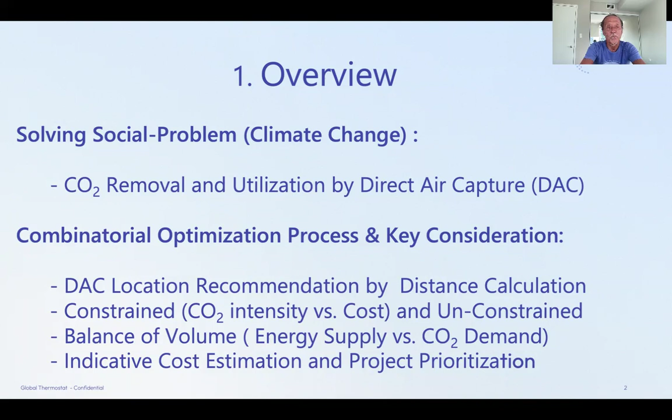My presentation today starts from solving a social problem: climate change, CO2 removal, and utilization by direct air capture, DAC. My data science benefit is a combinatorial optimization process, and its key considerations are DAC location recommendation by distance calculation, constraint, CO2 intensity versus cost, unconstrained, balance of the volume, indicative cost estimation and project prioritization.

Please allow me to present the video for a minute.

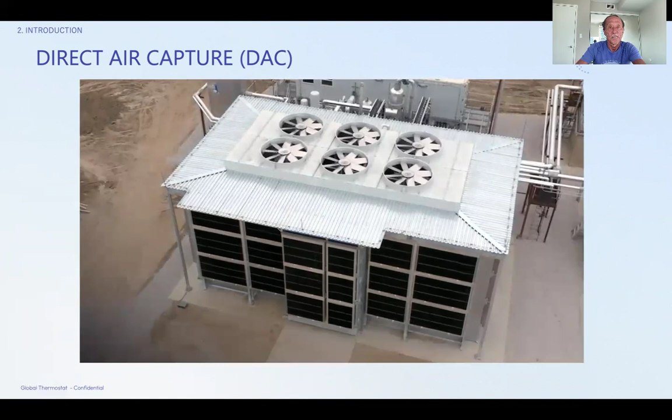Global Thermostat has developed a unique and powerful direct air capture solution to address climate change at its source and unlock massive, more sustainable industries. It's now clear we have emitted too much carbon dioxide into our atmosphere. We urgently need to remove billions of tons of this greenhouse gas to successfully address the climate challenge and rapidly replace fossil carbon with air carbon to power our economy.

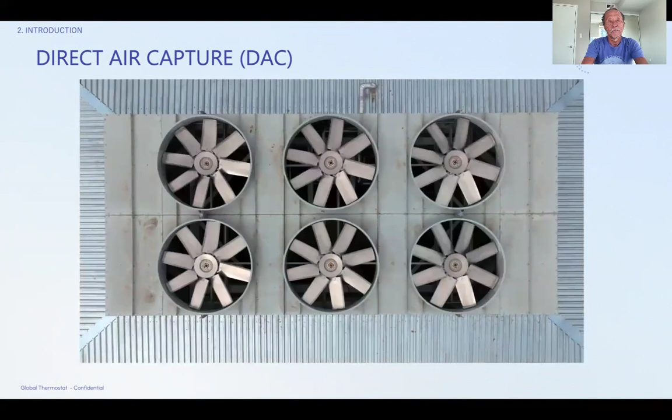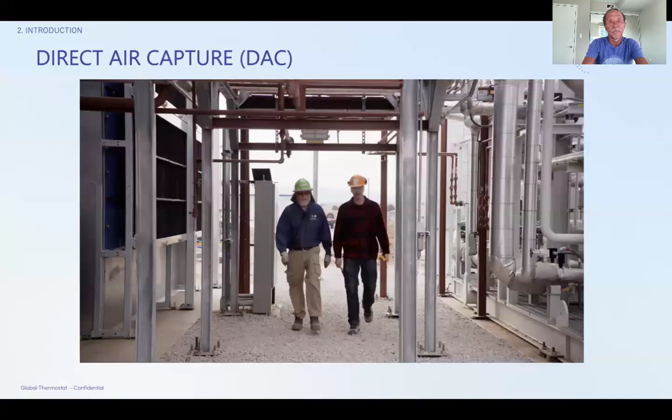Global Thermostat's patented direct air capture technology is the key to large-scale, low-cost carbon removal and the next industrial revolution. In simple terms, our solution works by using highly efficient fans to pass large volumes of air over high surface area contactors coated with a proprietary substance that naturally attracts CO2. We then use low-temperature heat to separate out the captured CO2 and repeat the process all over again.

Why am I doing this research? My career started in the early 80s. I contributed to the economic development of countries with fossil and gas resources. You can see the map; the company I used to work for, JGC, is specialized in engineering, procurement, and construction for oil refineries and liquefied natural gas. Some locations may be familiar to you: Pertamina Cilacap, Singapore Refining Jurong, Pertamina Arun

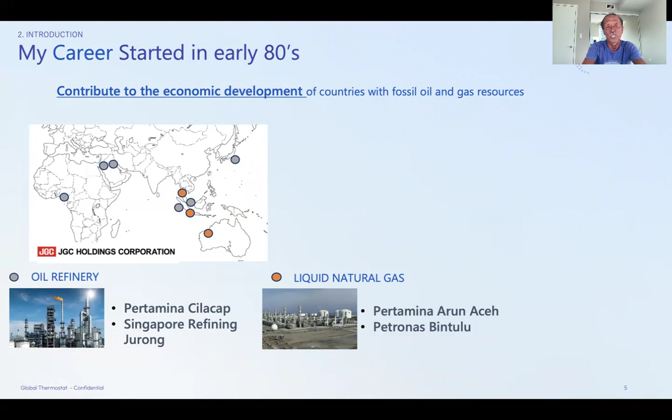Aceh, and Petronas Bintulu. After 40 years, I realized my contribution to oil refinery and liquefied natural gas projects is actually a source of CO2 emissions. As you may know, we must remove the CO2 permanently from the air. On this chart, we are always talking about how to reduce CO2 emissions.

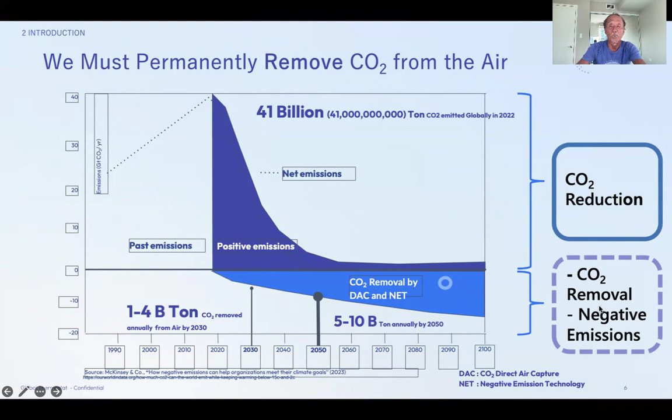The technology I'm currently focusing on is how to remove the CO2 already accumulated over the last 100 years. So we need to understand CO2 reduction technology, CO2 removal, and negative emissions. My technology is focusing on CO2 removal. Of course, we need CO2 reduction efforts as well.

So let's summarize the big picture of CO2 reduction and CO2 removal. Direct air capture is a part of negative emission technology, alongside planting trees and BECCS. Once the CO2 has been removed, we have two ways. One is storing it underground, which we call geologic sequestration, and its annual potential market size is 3.6 trillion US dollars by carbon credit.

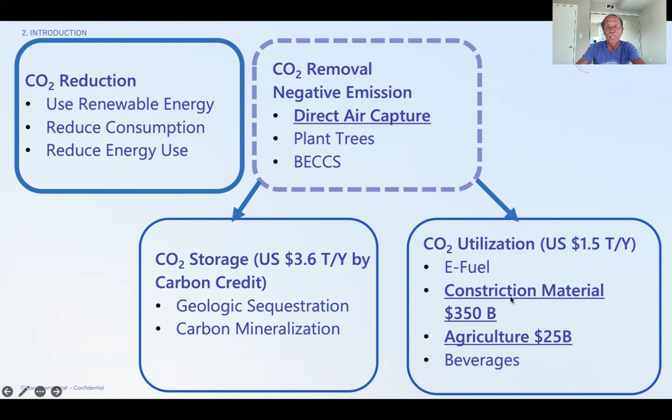The other way is utilizing the CO2 captured from the air, and the global market is about 1.5 trillion. Today's research is focused on one of the applications, construction material, which is about a 350 billion global market, and agriculture. In reality, the 1.5 degree goal cannot be achieved at the current pace of progress.

In 2023, only 10,000 tons were captured globally, and only 18 units are operating. By 2030 we need 1 billion, and by 2050 we need 5 billion tons to be captured from the air. We are far behind the original schedule. Data science can support accelerating DAC deployment.

But what's lacking now is that industry-specific practical data is not available. Easy-to-use tools and methods are not available. Data-driven justification is not there yet. Everyone is talking on the global scale, but there is no micro and local perspective. The balance of quantity is unfortunately out of consideration, and the sharing economy model is also lacking consideration. We need a solution for this.

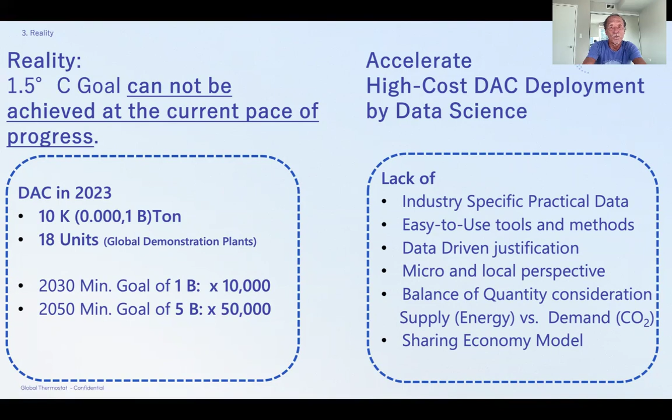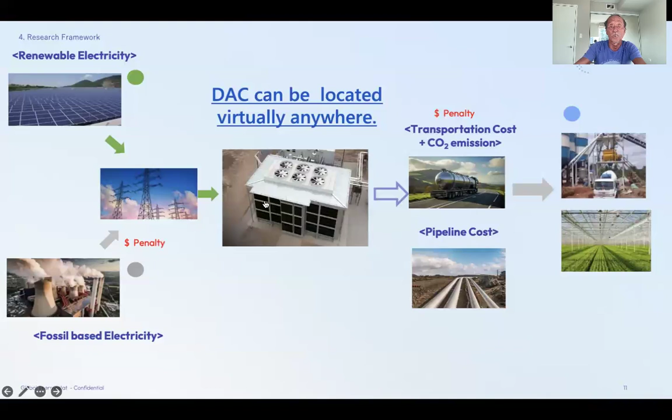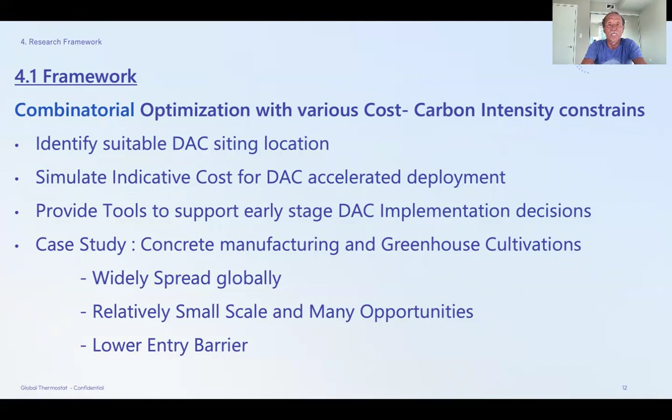Once CO2 is captured, we have to transport it. So this is the whole picture. The goal of the framework is to identify suitable DAC siting locations and cost estimation tools. This is the system architecture. On the other side, we need to acquire data, put our industry knowledge on the table, and combine the two with computing skills. We need to calculate distance, cost estimation, and optimization, and share the environment. So this is the system architecture.

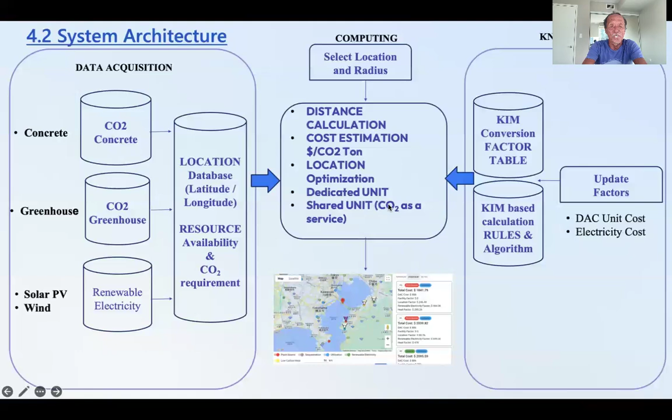This is a sample screen of the output of our prototype system. This is the Tokyo region area. Let me explain how it works. Yellow is the concrete plant, and the green dot is electricity.

So electricity is everywhere, and concrete companies are distributed in some locations. And our algorithm can say, this is a good example. This purple triangle can tell us where the DAC should be located by cost consideration. And you can see 1, 2, 3, 4, and each of these 4 plants is 25 tons.

And that has 100 or 200 to 300. Let's say 100 is the DAC maximum size. So the sum of the 4 locations is equal to 100 tons; we can put in one DAC unit. And if we exceed 100, let's say if you choose 1, 2, 3, 4, 5, it's 175, exceeding 100 tons, so we need 2 DAC units. So this is a kind of combination of the locations.

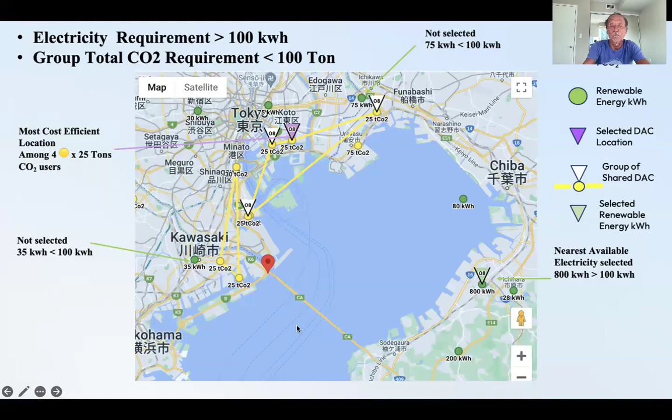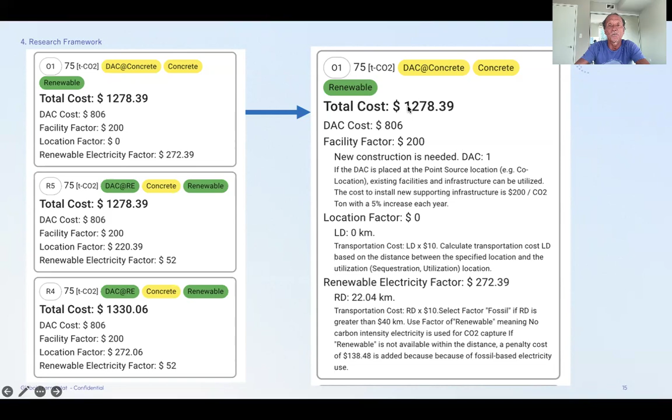And once the system calculates the optimal location and also the grouping, where the DAC should be, which plants should be selected and which electricity we have to use, all calculated by distance calculation and weighted factors, the system can tell us option number 1, priority number 2, number 3, and for each option the system can display the logic behind why this location has been selected.

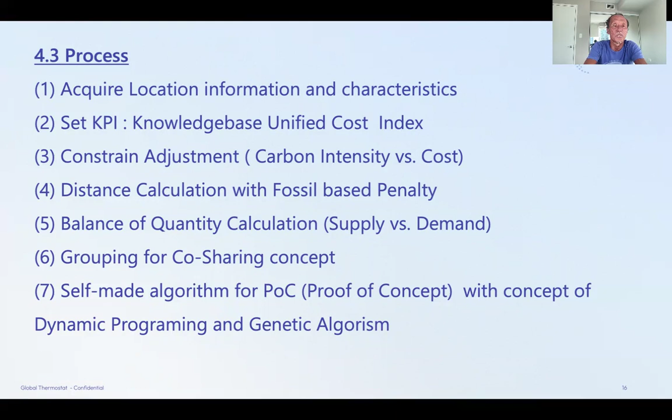And the process, back to the system architecture: acquire location information, set the KPI, constraint adjustment, carbon intensity versus cost, distance calculation, balance calculation of supply and demand, and grouping consideration. All together, I tried to apply the existing genetic algorithm or dynamic programming, but the system itself combines 2 concepts of the algorithm. It is put into my self-made algorithm for the proof of concept.

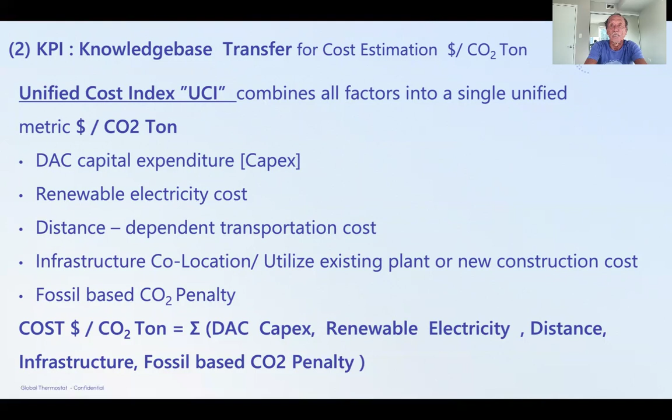Now this is sample location data and the calculation of the knowledge into this formula, and we can specify 1 KPI, which is the knowledge-based cost estimation per ton. This is the indicator to evaluate the locations. And this is industry data, I'm sorry. We picked 1, 2, 3, 4, 5 of the most important influential factors to transfer the knowledge into the CO2 per ton.

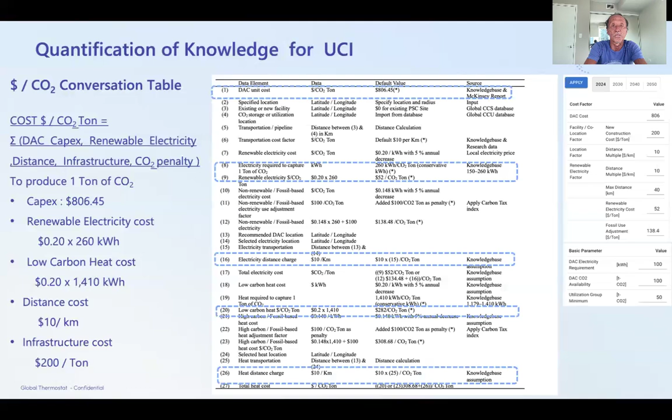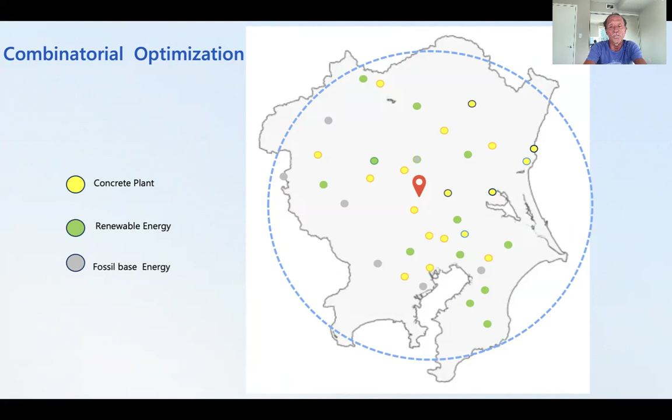Then let's go back. This is the Tokyo metropolitan area. Yellow is the concrete plant, renewable energy is here, fossil-based energy is the gray. And we have a 100-ton DAC. How many DACs do we need? Where to start? How to group it? That is the puzzle. And my system has a logic behind it. But it's not easy.

Let's say green is electricity, and this is the concrete location. If we put the DAC at the yellow location, yes, we can do that. But we are using fossil electricity, which emits CO2, so we have to put a penalty on that. If we put the DAC at the renewable energy, let's say a solar panel location, it's great. However, the CO2 is captured here, and this is a concrete plant. We need to transport the CO2 by truck or pipeline from this location to this location. So this is additional cost.

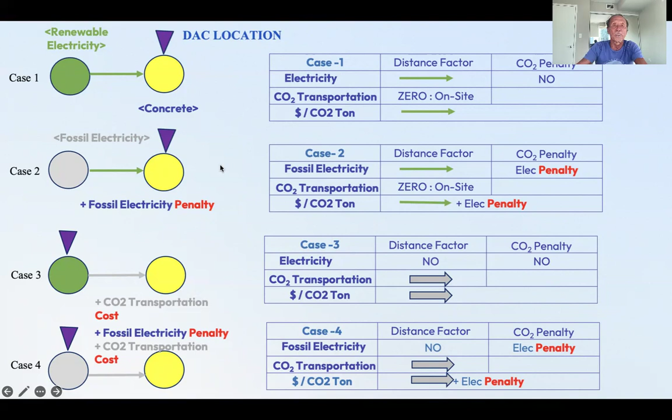And if we use fossil energy, all kinds of penalty and the transport cost are integrated into the calculation. And also for the shared environment, as I explained before, the DAC is 100 tons per year for 1 unit. So we group 20, 30, 40, and one group is a total of 100 tons. This will be great. But where the DAC should be, it can be here, here, or here, by the distance to the electricity. So all kinds of constraints are involved.

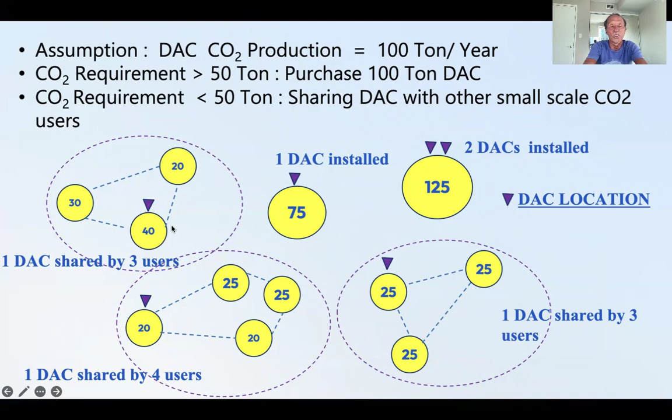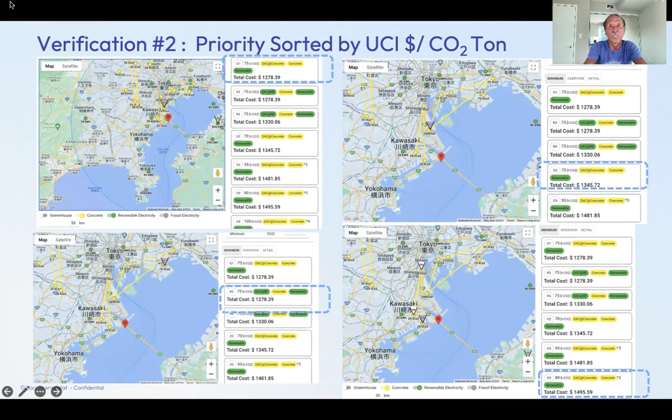And I did some experiments with the real data of the Tokyo metropolitan area for concrete plants. I specify the center location and I need to know where I should put the DAC. I can set the radius here to 50 kilometers. And the system can automatically identify the grouping and the location where the DAC should be. And also, these are the options. Option number 1 is this one. Option number 2 is the same location, but the DAC location moves to this location. Number 3 is here and number 4 is here. It is sorted by the total cost per ton of CO2.

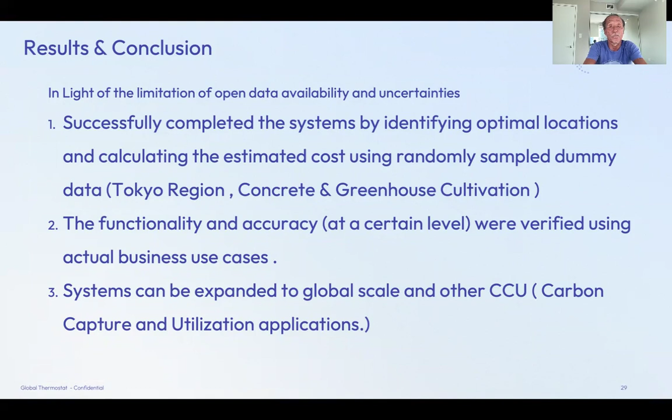And if I change the central location to here, I'm sorry, then a totally different grouping and selection is identified. And I used the greenhouse, same here. The result is we successfully verified the system functionality and accuracy. And this system can be expanded globally and to other CCU applications.

And my future research: this time, my coverage of the research is concrete and greenhouses, but we can expand to synthetic fuel or sustainable aviation fuel. And also the cost is improving year by year. So I need to apply a learning-by-doing method, as applied for solar panels. Then I can project the future optimal location and the cost estimation.

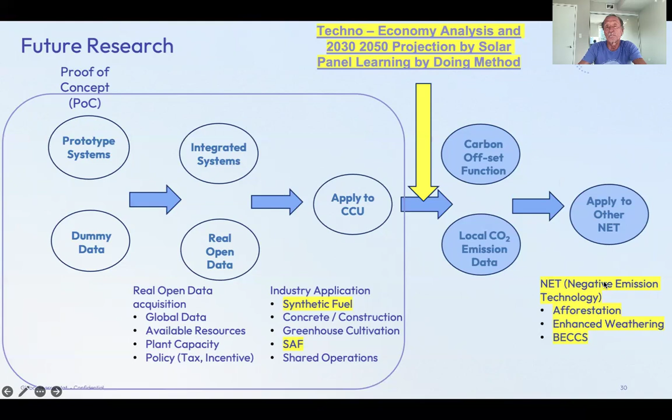And once I create the whole system, I'm talking about DAC only, but this can be applied to other negative emission technologies, such as afforestation, enhanced weathering, and BECCS. And this is the learning model. And this is a potential market for utilization and sequestration.